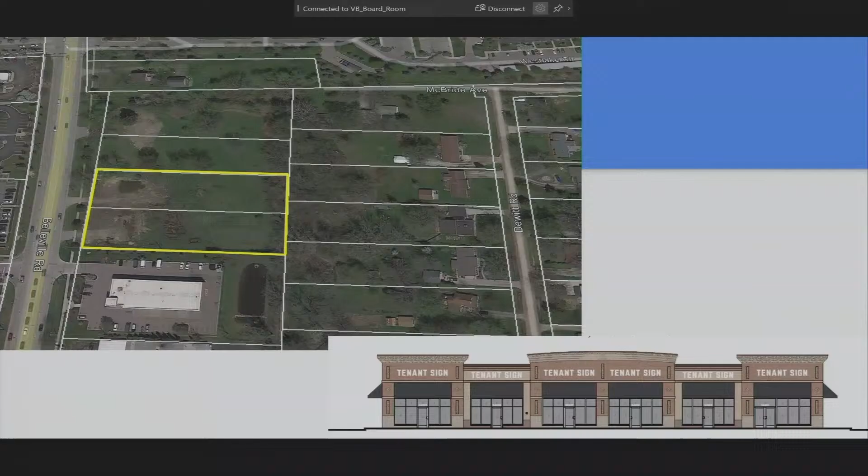And what is before you is a multi-tenant retail building with white box tenant spaces. Although the applicant has special land use approval for a drive-through, special land use runs with the land. However, the proposed uses on the site do not include a drive-through component. Should the applicant choose to add a drive-through in the future, they will have to come back before you because the existing layout of the site will not work for a drive-through. So they will have to come back before you for a full site plan approval. In the event, they will not need to go through the special land use approval process though.

So the site comprises of multiple parcels of land. We would like all of it to be combined into a single tax parcel ID prior to issuance of permits. As I mentioned, the site is being built as a multi-tenant retail unit space with multiple tenant spaces. The site is zoned C1. The uses proposed at this time are 2 of the 6 tenants being sit-down fast casual restaurants, and 4 tenant spaces devoted to retail stores. All of these are principal permitted uses in the C1 district. The proposed building complies with all of the required setbacks and the height limitation for the C1 district.

With regard to access for a site with the frontage that this site has got on Belleville Road, only a single access drive is permitted by the zoning ordinance, and a 32-foot wide, 2-way access drive has been proposed, which is consistent with what was shown on the 2018 plan also. Cross-access is required for most of the parcels that are up and down Belleville Road.

The applicant does show a clear stub along the north property line to connect to the parcel to the north. To the south, there is an existing cross-access easement with Bell Tire.

However, based on what the applicant has let us know, Bell Tire will not let them connect to that cross-access easement. I think the township has to further investigate that, because the whole point of requiring a cross-access is to allow your neighbor to connect to it, but apparently Bell Tire has insisted they're not going to allow that to happen even though there is an easement in place. So that is something the township will have to explore with legal counsel in order to find out what can be done from our end to make sure Bell Tire does allow that. Apparently they decided they don't want to allow it.

Which is Sherwin-Williams. Apparently, Sherwin-Williams has got very strict requirements of what the tenant space configuration and the parking abutting it must be for them to actually sign a lease with such building. And apparently, if there is one-way circulation, the applicant will have to make the parking spaces on the south side angled so that people don't try to go on the wrong side of the driveway. Sherwin-Williams does not accept angled parking spaces. They would like to have two-way movement on the south side of the building per the applicant.

So at this time, the applicant is seeking a deviation from the 5-foot buffer requirement from the Planning Commission. I will defer to the applicant to make their case before you for further discussion.

With regard to mechanical equipment, there is a transformer pad that is shown on the east side of the building, and it is shown screened by some boxwood shrubs, some fountain grasses, and a linden tree.

At a minimum, the height of the landscaping that screens the transformer must meet or exceed the height of the transformer. It's not screening if it's shorter than the transformer itself. So that's a note to be made.

This site is located in our Belleville Road Overlay District, and as such, it has additional standards for public amenities, such as bicycle and pedestrian access to be provided. There are 3 bicycle parking spaces located near the outdoor eating area on the southwest side of the building.

Other than that, some other basic ideas on geometrics of emergency access around the building shall be reviewed by the township fire marshal. Soil erosion and sediment control plans and permits will be required from Wayne County. And in general, all other engineering requirements based on the township engineering manual will be required as part of

the applicant's engineering submittal. But at this time, based on engineering feasibility and accessibility to township facilities, Fishbeck recommends that the Planning Commission grant the Belleville Road Retail Development Project preliminary site plan approval based on this feasibility. And with that, I'm happy to answer any questions that anybody has.

Thank you. Thank you, Mr. Kamer. Director Power, do you have anything there from the fire marshal?

Thank you, Mr. Chair. The applicant did provide an updated set of plans, and the initial reports that were provided attempted to address some of the comments. The fire marshal provided a later version of his memo that I had thought made it into the packet, but I'm having a little trouble locating it, so I'll refer to the updated comments digitally here, if you bear with me just one second.

The fire marshal has reviewed the site plan as part of the preliminary staff site plan review process. There are some comments regarding water supply, and the main comment is that the plans show three fire hydrants spaced around the building on an 8-inch ductile iron water main. Those three hydrants will be adequate for supplying the required fire flow.

Dan, is it possible to get our site plan up? Thanks. I didn't hear what happened prior, but we were here a couple years ago with basically the same type of building design. There's a tenant moving in that drove us to relay out the site versus the way it looked previously.

We have more parking in the front versus what we had before. We had a lot of parking in the back, so this actually works out better for pedestrians as well as the tenants for customer traffic. Everyone likes to park in the front versus the back. They're not going to walk around the building.

So we did not redesign the building. We kept it the same color and design as what was previously approved for preliminary site plan approval. We were getting ready to come in for final, but some issues came up with interested tenants and parties, and we went through some changes, so that's why we're back here tonight. I want to clarify that the two parcels will be combined into one parcel as this goes through the planning stages.

We will have a cross-access easement shown on our plan that would run from site to site. It's been noted that Bell Tire is very against having the cross-access. I said their attorneys are going to get involved, and that it's out of my jurisdiction so I'll let that be dealt with by others. But we have provided it, and we've lined it up with where theirs would be, so we've met that requirement.

The topic has come up regarding the DTE power lines that we have to reroute around the building. I understand your ordinance wants things underground. These utility poles, which we're proposing to go behind the building and wrap around, that will be determined by DTE. We have no jurisdiction on that. The feed from those poles will go underground to the transformer, and then underground from the transformer to the secondary power to the building itself.

DTE will not talk to anyone until you have a legitimately approved project, so we can't get into specifics other than the poles will be relocated around the building to meet DTE's requirements. We've got enough of a green belt loading area behind the building, which actually worked out better in this concept for that to happen. I wanted to bring that to your attention.

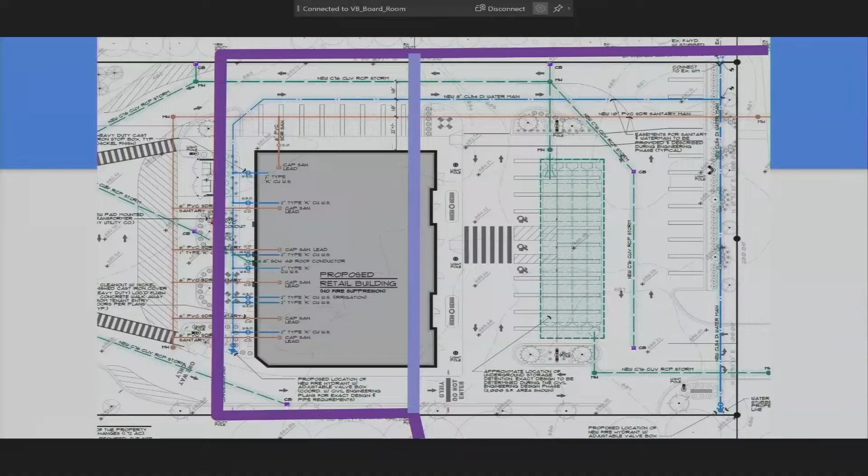Regarding the comment about our landscaping in the front where we have perennials, we've shown that we meet that requirement. We had the right quantities, actually more than what's required, and more than the linear footage required. So our landscaping is in greater supply than what's required per the ordinance.

One issue I want to discuss is our interior parking lot landscaping. Based on our calculations, we need roughly 2,400 square feet of green area on the site. We've met the spirit of the ordinance for that. There were some comments that the sizes of some of our areas don't meet your minimum of 360 square feet for any green area.

That's kind of hard to do in reality—you're at a 10 by 36 area or a 20 by 18 area to accommodate that. We have met that requirement overall. Behind the building we've got a lot of green areas, a seating area with a couple tables for staff to take a break and eat lunch. Our transformer is located behind the building, and we've got some trees and planting there.

We've met the spirit of that. Some of the islands, like the one in the upper left by the tree in fuchsia color, can't be any larger because of our tracking requirements for Sherwin-Williams, which we've already declared as the tenant. They use the largest semi, cross-country, over-the-road sleeper truck, so we had to make sure that could track in, and we had to massage our curbing so their truck can actually get around the site.

So when an island falls short—for example, up here we have a lot of room, but we can't make it greater in size because the truck just can't maneuver around—I understand the ordinance, and while each specific island doesn't meet the 360 square feet, when you add them all up overall we have met your ordinance. Some are larger, some are smaller, but in general we have met that requirement. We did our best, and I know this board has the ability to approve that.

So I do want to address that topic. The other thing I want to bring up is we have met your tree requirements. It was noted that maybe we changed some of our trees to a shade tree, and I'd prefer not to.

In the old days, when I was going to college and working in a firm, we could have light poles that were 50 feet high. Now you just can't have that anymore. So in any event, I'd like this board's consideration on, we do meet the ordinance as far as the number of trees and the species, and I'd like to keep it as what we have currently on our plan.

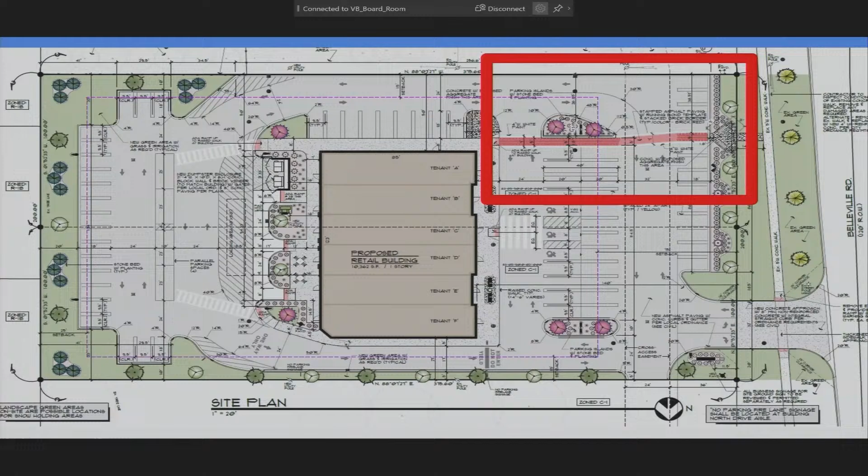Now, one of the things I do want to point out, it was mentioned about building materials and colors. Our building will not change from what we had provided last time we were in here, and we will bring samples of the two burnished block colors down here, and then we've got two different shades of brick. So we're just working through that with our office, getting samples from manufacturers. Before we come back for final, we would definitely bring those with us.

So with that being said, that kind of addresses some of the planning comments. The engineer regarding civil engineering basically recommended approval based on their comments. We forwarded those comments to our civil engineer so he can get those reflected in his package for the final submittal. He's working on that currently.

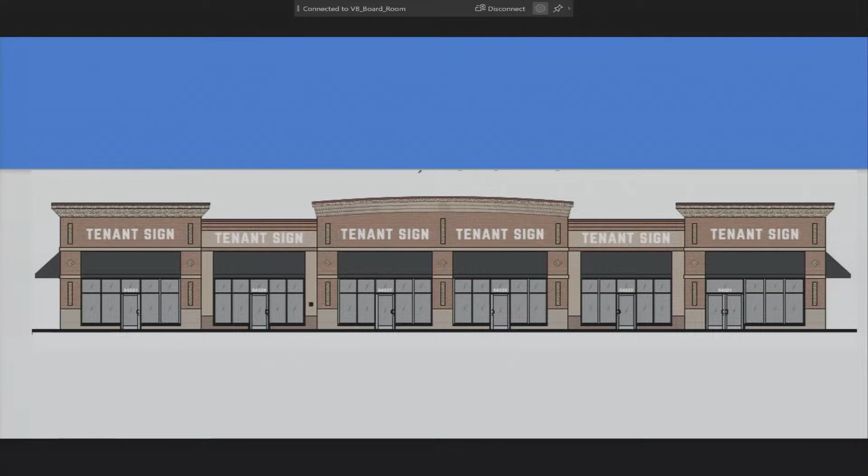I just came in at the tail end regarding the fire department, and I want to point out that they said we have access as shown on our plan, so it's adequate. We've satisfied their tracking and submitted the emergency vehicle access plan, so they've noted that. We'll obviously have proper addresses on the front and rear per code.

That's just typical. For Knox boxes, some communities allow one per building. We've shown one. We don't know how many tenants will be here, so where they're going to go and how many we'll have is just something we can't provide at this point.

Typically, when the tenant improvement plans are turned in, the fire marshals and communities will put a note in that a Knox box is to be provided. When they come out to do their final inspection, they verify the Knox box is there. We do design build work ourselves, and when we design a tenant space or building, we hand over the keys to them. We meet them on site, they put the keys in the box, and it's done.

So again, those are items that shouldn't delay any type of approval. With that being said, I will answer any questions.

Jason, I don't know if you want to make a couple comments. Jason Kishmish from Grand Management and Development. Appreciate all of your time and consideration for our plan.

It has been a long journey here. Just to give you a little bit of background, because I always get asked, what are you doing on Belleville Road? What's going on? Dan and Vidya, we've worked tirelessly, and I appreciate everything they've done to help us bring this hopefully to fruition. But we had preliminary site plan approval back in 2018.

I can't believe it was really that long, but feel like the Lions, man - we've got to get this one over the finish line here. 2018 preliminary site plan approval. We then went to engineering, engaged Wayne County in a very tedious civil review. Their process is exhausting, but we were actually permitted and approved through Wayne County at that time. We met all their ordinances and requirements. We will do the same thing again - whether they need something tweaked or not, we'll get through that.

But then the pandemic kind of hit. By the time I got enough tenants to actually justify building the thing and being able to get the financing in place, the pandemic hit and everything went awry again. Unfortunately, a majority of the tenants I had committed at that time kind of flaked away because of all the different things going on.

I worked for the next 2 years tirelessly to try to attract different users, and we spent a real good amount of time playing around with other users that probably weren't as desirable to the community as this plan. Instead of going down that path and wasting more time, whether it's a car wash or a gas station or whatever it may be, I said, let's just go build what we were intending on building. I had faith in the plan then. I have faith in it now.

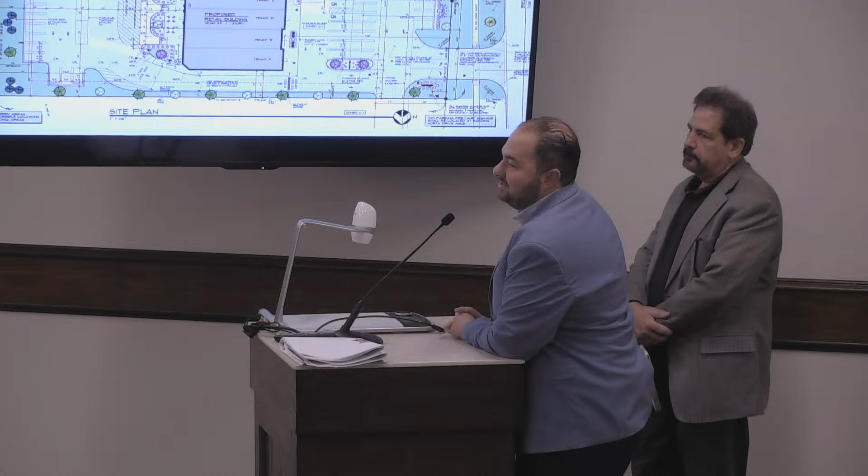A little finicky about what they want, and I'll give you a little background on why this loading and why we would appreciate reconsideration for the landscaping buffer that was waived last time. They use a WB67 truck, which is probably, like Ron mentioned, the biggest truck that they have. At some point they had an accident where their loading truck ran into somebody coming out of the buildings. Since then, it's kind of been their corporate policy that they really have the loading segregated in a way that it's as safe as possible.

I had a lot of heartache with it because it meant I had to give up my drive-through, even though we gave them countless renditions of loading that was segregated and safe, and that drive-through could still function. Unfortunately, we just couldn't get them to accept it. So I had to make a decision: table this back, go start again, find someone else, or give them what they want - give up my drive-through, which is incredibly high demand in your community.

And I said, I want to build something here this year. I'm done and sick of looking at it just sitting there, with a ton of money tied up into it. So after considering everything, this was really the best plan put forward. We gave up the drive-through, and we gave them the loading that they wanted. I've built this stuff all over the state - we probably have a little bit less than 1 million square feet in our portfolio.

I can tell you from our standpoint, we hate one-way drives because people are people and they will still find a way to go down a one-way drive. You want to give them at least one option to get out of the site if they're trapped, and I've seen it happen - people just do what they do, unfortunately. All we can do as designers is try to mitigate as much of that as possible. But there's no plan on earth that we can ever give anyone that will completely eliminate any risk. That's just the reality of the world.

This two-way drive is really fundamental. Sherwin's basically told me it's a no-go if they don't get it. One, for their loading to be able to come in the way it needs to, comfortably. And two, for our purposes, having a second option for people to exit the site from the rear is very beneficial and will create less issues with loading and anybody else going down the one-way drive.

Cross-access with Belle Tire - we beat this to death back in '18 and tried again recently. They're really busy at that tire store. They don't want anyone else's traffic coming through their door. The exact words we were told were, 'we'll fight it to death.' We were not required to do it for our site plan, or if they were, it was never recorded. They indicated they would not be open to that. I even offered money and told them if there's anything else we can do to enhance their site, but they were not willing to budge. So we're obviously still showing it.

I'm not crazy about cross-access from other sites, but I understand the rationale behind it and the need to keep people off the roads. It depends - if you've got a really high-volume user next door using your site to circulate through, it causes other issues, but it's in there.

Ron's been drawing this stuff for me for 20 years. I argue with him every time, and he always ends up winning some way, somehow, out of what I want to do sometimes, because at the end of the day, he's the design professional. He knows there's certain things these buildings need to function, and we don't always understand it, but all that goes into how these things are successful.

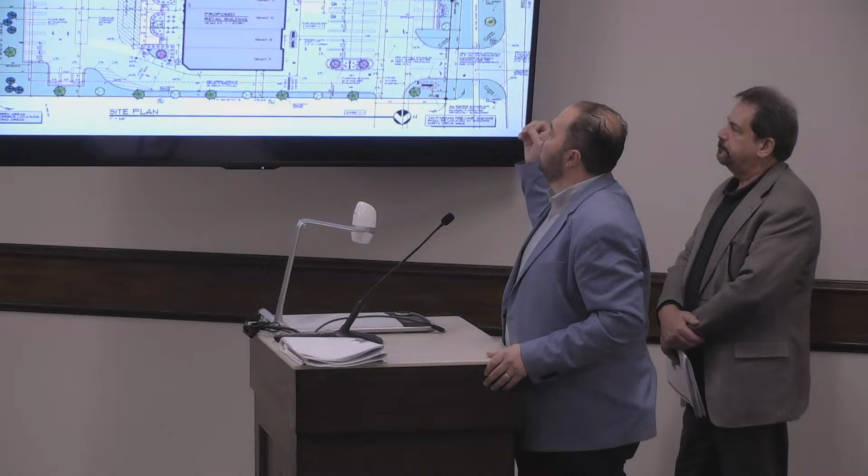Having a little more parking up front - I was always a little concerned about that with the initial plan, but the drive-through necessitated it, just our overall layout necessitated it. Now with eliminating that and putting more parking up front, we've got more flexibility to bring not just a carry-out user, but maybe a family restaurant or something that can sit down here. I like it better - it minimizes customers walking all around the building to the front, which is better for safety. I don't like that we pushed the building further back, but that was the balance of getting more parking up front and making the development safer and more customer friendly.

A lot of thought's gone into this. We've exhausted so many different avenues, so many renditions of this plan. Like I said, Dan and Vidya, I've probably taken up their patience on this thing. But as challenging an environment as it is to build anything right now, I can tell you from a development standpoint, it's probably one of the worst times ever to build.

I'm ready to go on this, and we'd like your support tonight. If we are, we'll get this up and running in 2024, and hopefully get some quality tenants. The people I'm talking to right now are all national brands, quality ones. This will be a very similar development to what you see further down the road where the Starbucks is - color schemes are very similar. I think we have maybe a little more parking up front. They have a drive-through, we don't anymore, but that's the spirit of the development. I thought that development worked out pretty well.

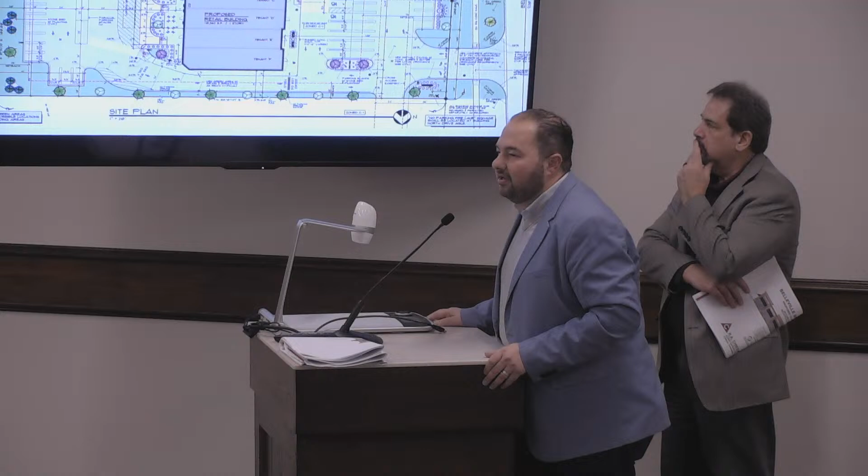So appreciate your help with this, finally getting it over the finish line. Whatever we need to do to address any concerns, by all means, we want a quality development. We don't sell our properties - we build them, and hopefully our kids someday can enjoy them. So I'm here to stay.

Thank you. Thank you. Planning Commission, questions, comments?

Through the chair, Commissioner Grant. I have a couple questions for senior planner, principal planner Vidya, and then some for the applicant. Just for clarification, for us as well as the applicant, when you're talking about building materials and colors, you use the phrase 'appear to meet.'

Could you clarify for everyone what that means? It's on page 20, where it says building materials and colors: the primary building materials, brick, and accent materials, EIFS and pre-colored ground face block, appear to meet.

We use the term 'appear' because sometimes earth tones, what we consider earth tones, and what the Belleville Road Overlay District requires, as we've learned the hard way, the print does not necessarily match what you see actually. So we say appears because on the rendering here, the color palette definitely meets the BROD district, but we would say that for sure once the Planning Commission actually sees, every single material used on the building must be brought before the Planning Commission. We're very sensitive about that.

I would have actually strongly encouraged you to bring it this evening, because if we do grant preliminary, you push all your materials into the final round, which means you run a lot more risk of not getting it approved that night. So I'd encourage you to do it early rather than later.

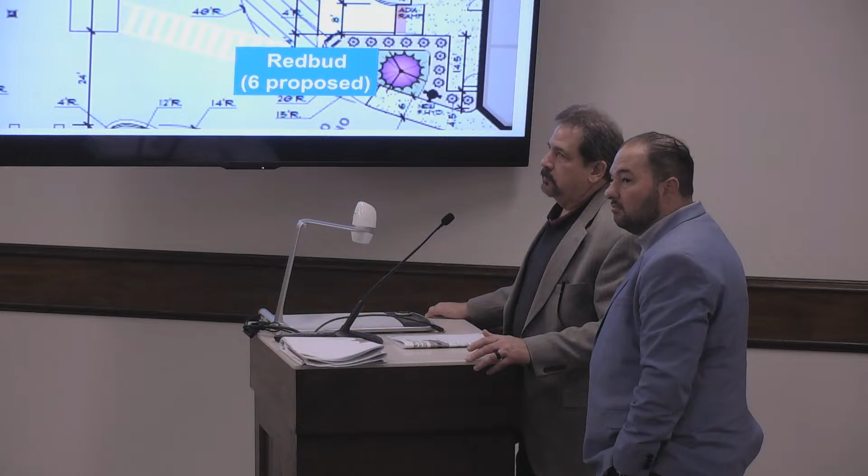And talking about landscaping, the trees—there's mention of a substitute of ornamental trees versus shade trees. Was that the case, what I had heard? Yes, I believe we had recommended that some of the landscape island trees be more deciduous rather than ornamental. Ornamentals are smaller with smaller canopies, but they're colorful. Shade trees help because you have so much parking creating urban hotspots, but then again taller deciduous trees have more extensive root systems.

Do we need them to pick up? So what kind are they proposing versus what's required? They're offering redbuds, which are ornamental, but linden would be more of a shade tree with a broader canopy. Lindens are the shade trees—we said instead of having so many redbuds, split them with lindens, and they do have a couple lindens on the site.

Okay, that's fine. And then just a quick question for the applicant. I noticed that your paving section is an inch and a half for automobile traffic. Do you have any concern - I'm asking because this is a heavy-duty truck carrying a lot of weight, the largest one that they have - that it might tear up the pavement on the south side to the point where it becomes a maintenance issue and looks bad after a while?

Some of my developments, I actually look at doing some of these drive-through areas specifically in concrete.

This whole idea of the loading really ticked me off with these guys, because their loading is once a week, maybe twice a week. It's not that prevalent, but they're just really sticklers about it.

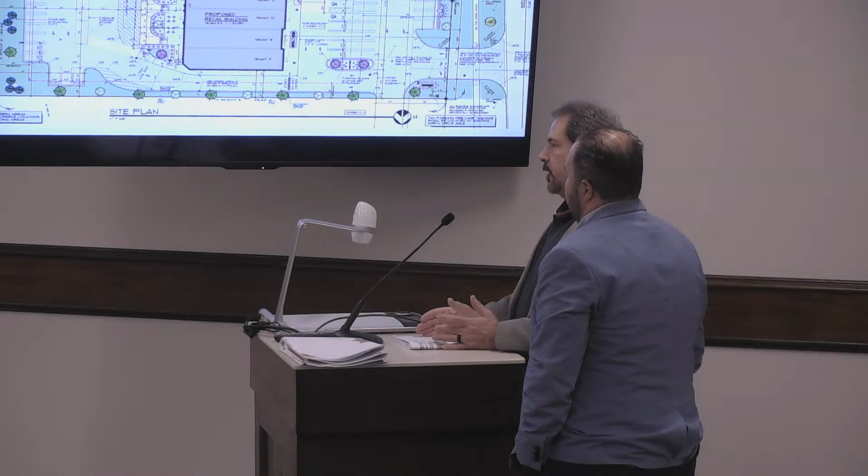That's true. So obviously, we have to do the minimum of what your ordinance requires. And if during construction it's evaluated that maybe we should look at a deep strength asphalt - but like Jason said, you have to have a good base. If you have a good base, you could have 1.5 inches of asphalt. Right, your base right now is a typical automotive parking base, right?

Well, you have the proper stone. We're doing a building addition right now - we tore out some asphalt paving that was 1.5 inches and it was just on sand. That was allowed in the old days, 1.5 inches on sand. Today, you've got to have at least 6 inches of stone plus whatever the asphalt mix is per each community.

So in any event, it's always taken into account what's going on at that site. It's not a road, it's not getting pounded like a road. The truck can't maneuver in here fast.

And as owner, you have to maintain it anyway, right? 100%, and it would be the biggest expense. I would imagine if it fails due to this truck or truck traffic, you're going to fix it, correct? I have to, I'm not going to have a choice. Just wanted to hear that thought.

That's our biggest thing right now with these parking lots, because the asphalt people are using has gone to crap. And it's easier to fix asphalt than it is concrete.

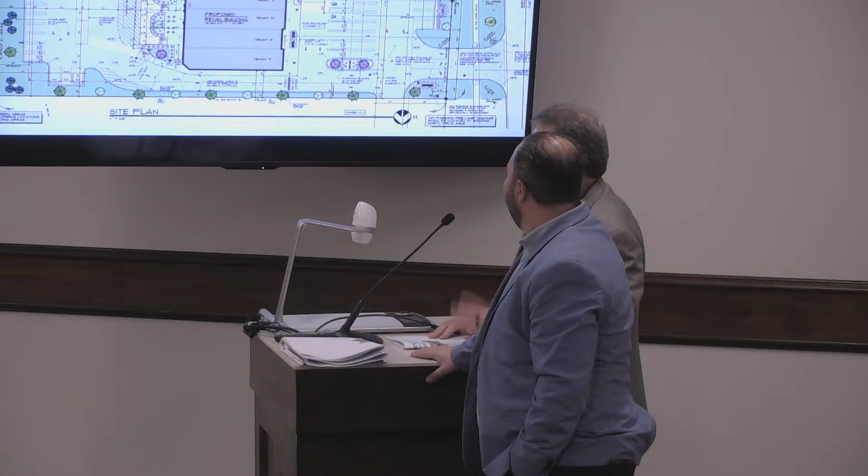Can I interject a question on that? I'm finished, you can go ahead. Did you have something, Commissioner Atchison? I'm done, thank you. Mr. Chair, I had a question for engineering.

Mr. Kammer, during engineering review, is the pavement depth that the commissioner brought up something that's reviewed in the context of the size of the truck going over it? Not necessarily as much as the size of the truck versus the usage. The engineering manual has minimums for usage - light duty, which this would be considered, is 3 inches over 6 inches.

Part of engineering review is to make sure the paving meets the engineering standards? Yes, 100%. So as long as it meets the minimums, then it falls back on the applicant for maintenance and things of that nature. So yes, for us looking at it.

One thing I forgot to mention - we had called out stone in all of our landscape beds, and you guys have stone not allowed, you have mulch. We have it noted as an alternative, we can certainly do mulch. We don't like mulch because you have to do it yearly - stone's a one-time thing, so it's always preferable for us.

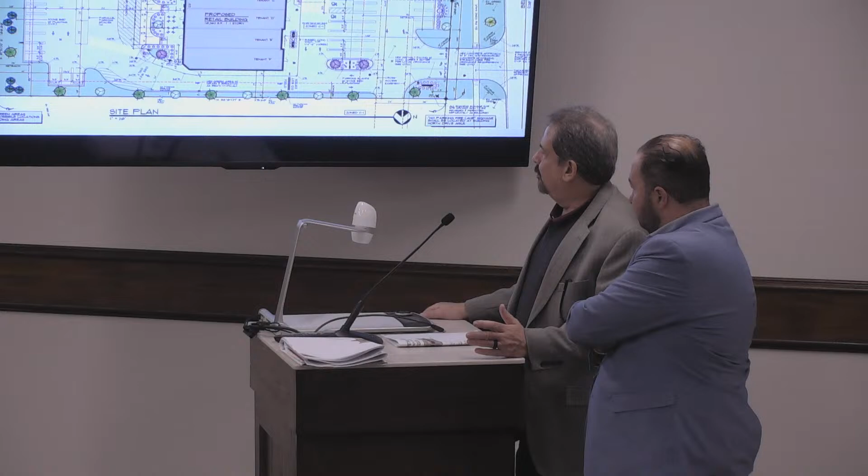You get landscapers who don't know what they're doing, they make the volcanic islands around the trees, which doesn't help the trees, and it just blows around. So we have no issues if the wood chips are what you guys want, that's fine.

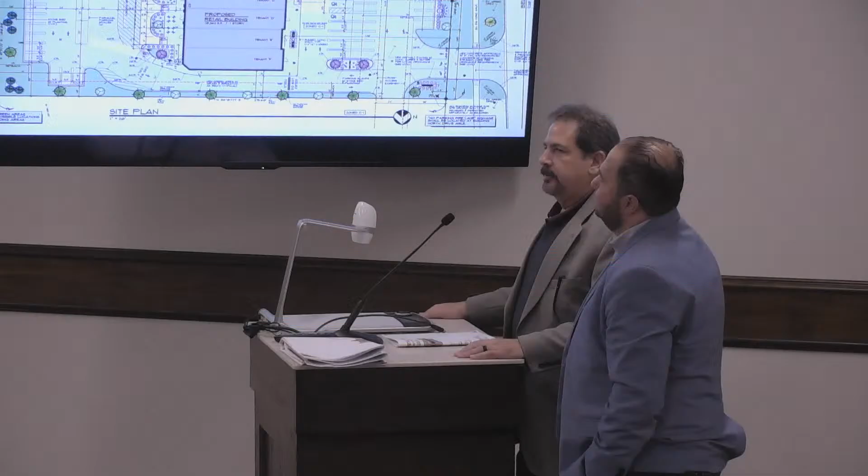But every project we do, we typically spec out stone for the aesthetics, though it doesn't blow around so you don't have to replace it yearly. The township typically does not approve stone on landscape islands though, it's just not attractive once weeds start coming in. So either mulch, or if you don't find mulch appropriate, you can put in lawn or live ground cover, like a creeping ground cover, something to cover the island with more greenery. You just have to make sure they put the weed barrier down so you don't get weeds in the stone. Still, no stone, the ordinance doesn't allow it. Yeah, no stone, I'm sorry, I spoke out of turn.

No, you're fine. I was going to say.

Mr. Chair, I had a question regarding the adjacent site across the street from Belleville Road. What, if any, driveways are across from it? I see one access driveway on this property. Do we have a situation where two driveways are facing each other, or are they well separated on the other side? It's the bank. Yeah, there are no driveways across the street that would do that, because they all have internal driveways that open to the west through a service drive. Bell Tire has one though, right? Bell Tire's driveway opens up right into it. And that's directly across from an existing driveway, the Bell Tire one.

Yeah, okay good. I had another question regarding the cross-access and the one-way signage. My first question is, when is this cross-access issue going to be resolved? Because right now it looks like we're talking an awful lot about traffic circulation when it sounds very likely there's going to be another cross-access on the north side of that plan. So I'm a little concerned about approving anything with a traffic flow when I don't know where the other cross-access drive is going to be. I'd be more comfortable knowing what the cross-access situation is going to be with Bell Tire and who's driving it forward.

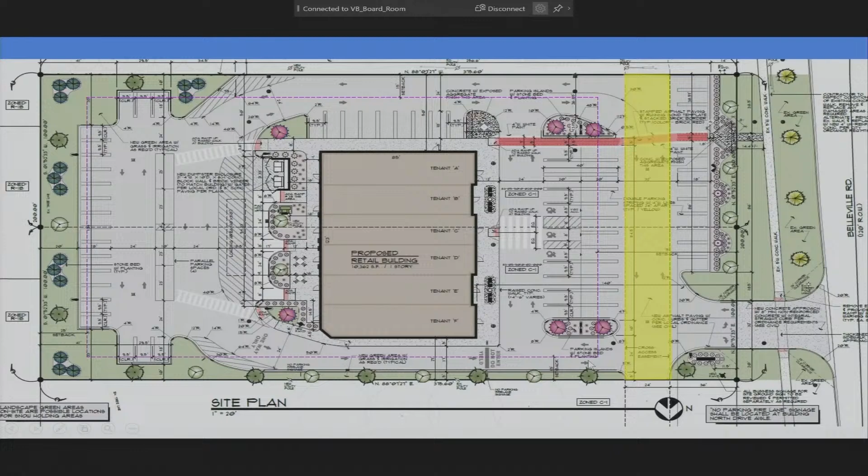What happens if someone comes from the cross access on the north side of the property and then immediately tries to turn left? There isn't enough lane there for two cars to pass. That's not true, is that not true? No, this is a legal lane right here, it only gets down to narrow for one way at the building itself. That is all two-way aisle accessible. Oh, it doesn't look like it. I apologize, it's just the width doesn't look like it. And that does meet the standard.

Oh okay, so it's a difference between 17 feet and 24. It goes down to 17 at the building, and that's why the signs are at the building. Correct, there's two arrows, one goes up and down in the rest of it. So even to here, it is 24 feet, all of this is 24 feet, two-way movement. Yeah, I'm going to say something as soon as I get back. There's the do not enter. Oh, I see where it is, so the sign is right here. Right there. Got it, and that aisle is dimensioned right at the cross access that shows it's a 24-foot aisle.

Got it. To the chair, we have done landscaping and approved stone before. We did it for Aldi's, we did it for Culver's, and we did it for Menards. Personally, I've seen more mulch running down the driveways. So I don't have a problem with them using stone, since we've approved it for three other venues, I do not have a problem if that's what they want.

I agree with that. I remember us having the approval for Aldi's, Culver's, and Menards. With that being said, the mulch—our sewer department has called businesses complaining that the mulch has gone into the sewage system via Belleville Road when we've had a downpour of rain. I'm also in agreement with our senior planner regarding the rear of the development, the islands being smaller. There's no issue there.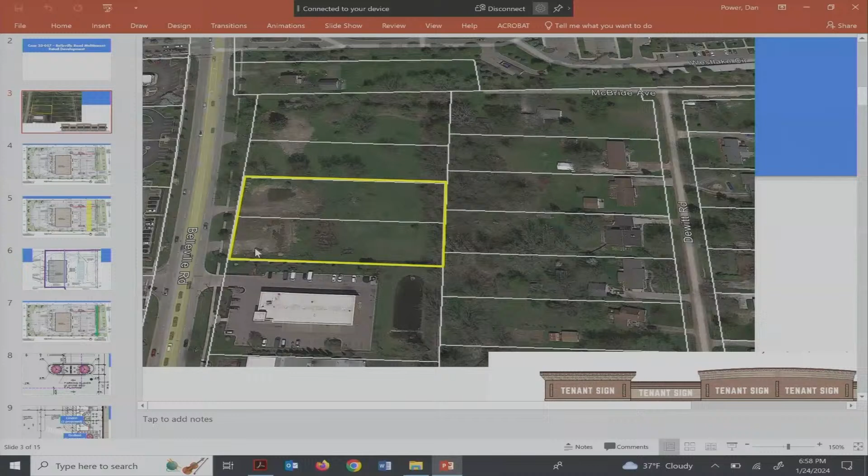We've gone through probably 10 or 12 reiterations of this plan. You have the same jurisdiction with the property to the north of us to have them push their approach as far away as you can. You already know that we've shown on our plan the radius for the cross-access. We've shown the cross-access, and it'll be recorded.

Again, I'm not averse to your plan, I'm wondering what's going to happen in the future. When we were putting together the Sumter Overlay District, that was a major concern, the number of cuts that could appear along that run. I notice in a lot of communities where they're developing, they have easements that limit the number of cuts across the front of the main drag so traffic maintains flow.

Exactly. So Mr. Chair, I'll answer. Yes, please. Okay, so that's the spirit of access management. We don't have a formal access management plan on Belleville Road, but with every site plan proposed, we infuse the access management standards in our zoning ordinance.

You have to balance that with the fact that you can't block any single property owner from having access onto a roadway. So when a plan like this comes in, we aim to consolidate driveways and direct people to signalized intersections on roads that are not the main road. As plans like this come in, as the applicant mentioned, they offset their driveway as far as they reasonably could to the north from Bell Tires.